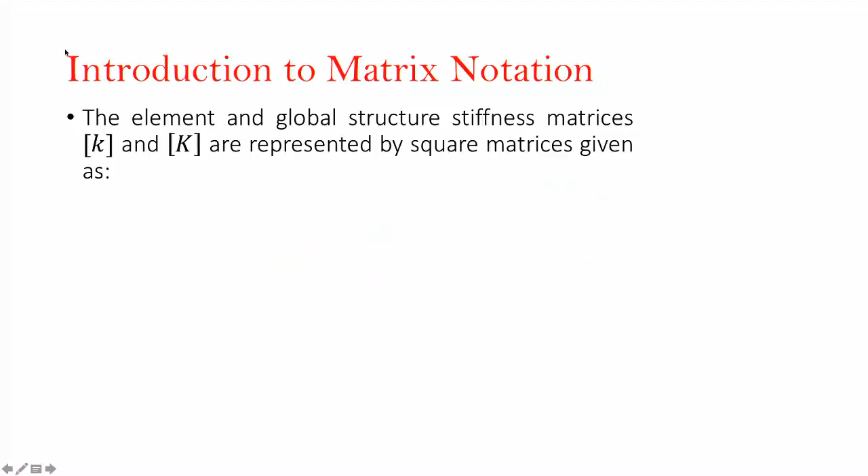Good morning, everyone. So today is the third lecture in FEA. If you remember from the previous lecture, we learned about the different types of elements and how to derive linear shape functions, and then we learned a little bit about the matrix notation.

So the last slide that I showed you last week was this slide, about the element stiffness matrix and global stiffness matrix. The element stiffness matrix is shown by little k, and capital K is for the global stiffness matrix. I put a point here, in green, that the size of the K matrix is showing the number of the nodes.

This is not really general, so I want to add another point to this. Whenever we have only 1 degree of freedom per each node, this statement is true. So the size of the global matrix, or even the element matrix, equals the total number of nodes, or the total number of nodes of that specific element. In other words, if the degree of freedom is more than 1 for each node, then you need to multiply the degree of freedom for each node by the total number of nodes, and that would be the size of the total K matrix.

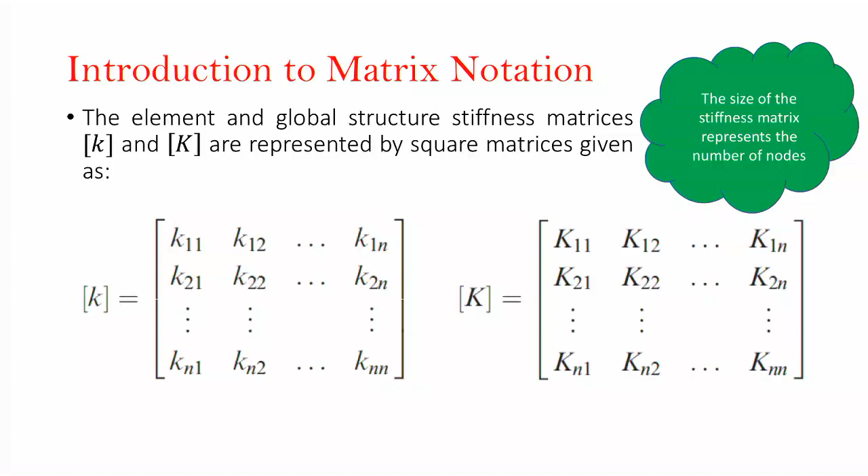So I'm going to explain it more using examples, but I'm going to update this slide after today's lecture. Right, so moving on to today's lecture.

So what we're going to learn today is we're going to solve a simple problem using FEA and learn how to assemble the global stiffness and nodal force matrices.

This is to just remind you about the 8 steps of going through FEA to solve an equation. As you remember, in the last session we talked about step 1, step 2, and step 3. Step 1 was about the discretization and choosing the appropriate element type. Step 2 was deriving a displacement function, which was basically showing the shape functions. It could be linear or it could be a quadratic function. And the third step is about the relationships between the strain displacement and stress and strain.

So these relationships can be obtained from the material. It depends on the material that we want to choose for that element or for the whole body of the structure.

So today we're going to go to step 4, 5, and 6: deriving the element stiffness matrix, how to assemble the element equations to obtain the global and total equations, and finally introduce the boundary conditions to solve the unknown displacements in step 6 and solve for the element strain and stress for reporting results after solving the equation.

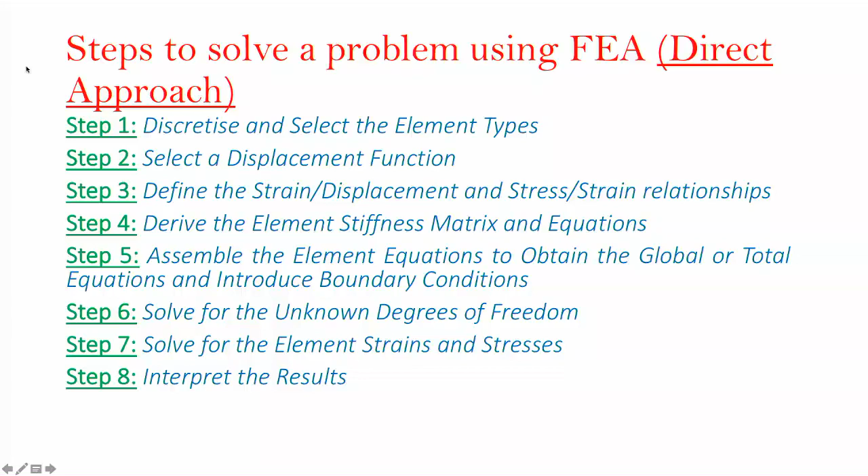So similar to Hooke's law, within each element or the total structure of the body that we want to analyze, this relationship should be satisfied: F equals KD. F is the force, like a force nodal matrix. K is the global K matrix or global stiffness matrix. And D is the matrix of displacement, nodal displacement matrix. So just keep this relationship in mind. We're going to use it over and over.

And if I want to expand it in the matrix form, it would be like this. If you look at the force matrix, the first subscript is showing the node number that the force is applying on, and the second subscript is showing the direction of the force. So F1x means that the force applying on node number 1 in direction x. And the same for F1y and the other node.

And if you look at the displacement matrix, U1 is showing the x displacement for node number 1. V1 is showing the y displacement for node number 1. And W is for the displacement in z direction.

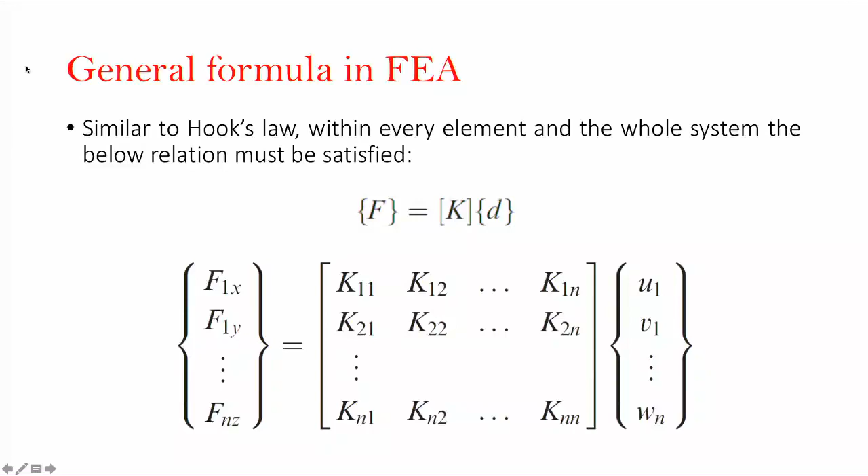So we start an example with this, the simplest example that we can come up with. Imagine that we want to analyze a linear spring. We want to start with only one element, so we assume that the whole spring is one element, right?

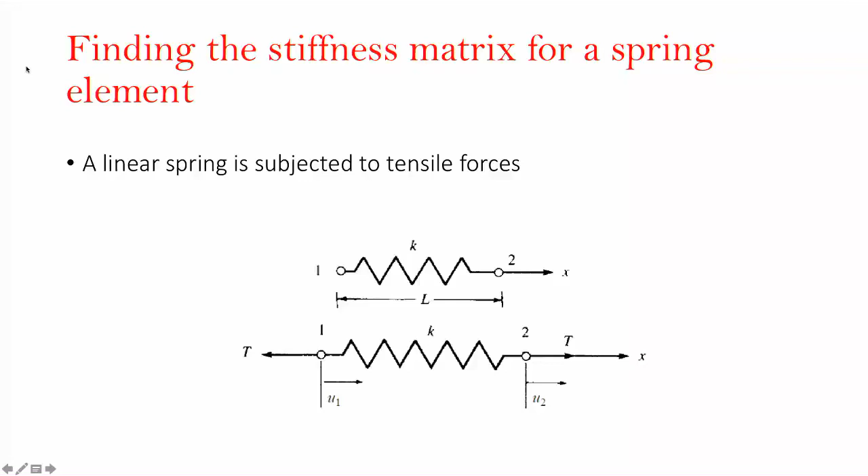So these are the assumptions that we want to make. The spring is linear, and we are applying two tensions on the two ends of the spring, which are equal to T. So we label each end of the spring as one node. The first end is node number 1, and the second end is node number 2.

Since we're only having the axial force, like the tension in x direction, we only consider the x displacement for these two nodes. In other words, we only have 2 degrees of freedom for this single element, U1 and U2, displacement for node number 1 and node number 2.

And the other thing is, the initial length of the element is L before applying any deformation to the spring. And based on the material property, or spring constant, is K.

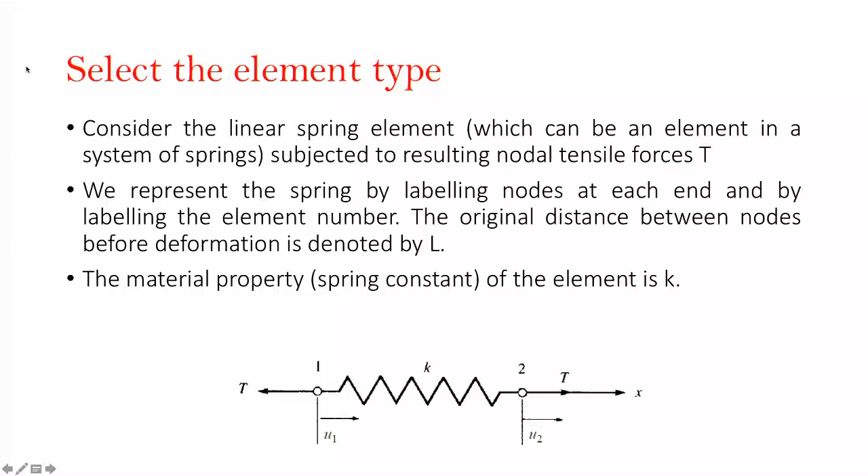So that was the first step. It was discretization and selecting the element type. We discretized the spring as only one element. We use the linear spring element with the spring constant of K.

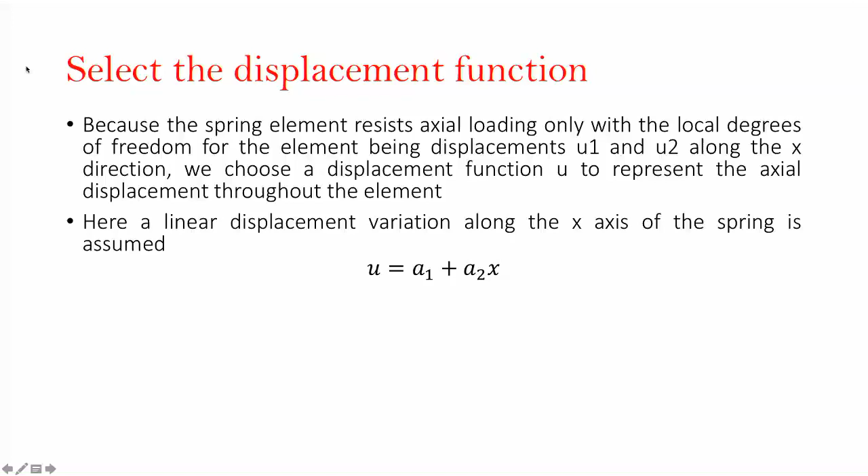Now the second step is choosing a linear displacement function. Since it's linear, we can just assume that, in general form, U displacement for all the nodes sitting on the spring equals A1 plus A2x. A1 and A2 are unknowns, and we want to calculate them pretty much the same as the way that we derived the linear shape functions last week. So here, since we only have 2 degrees of freedom, then we only have 2 unknown coefficients, A1 and A2.

So now we want to find out the A1 and A2 for the displacement function.

So I'm going to switch to the document camera.

So U, which is a function of x, equals A1 plus A2x.

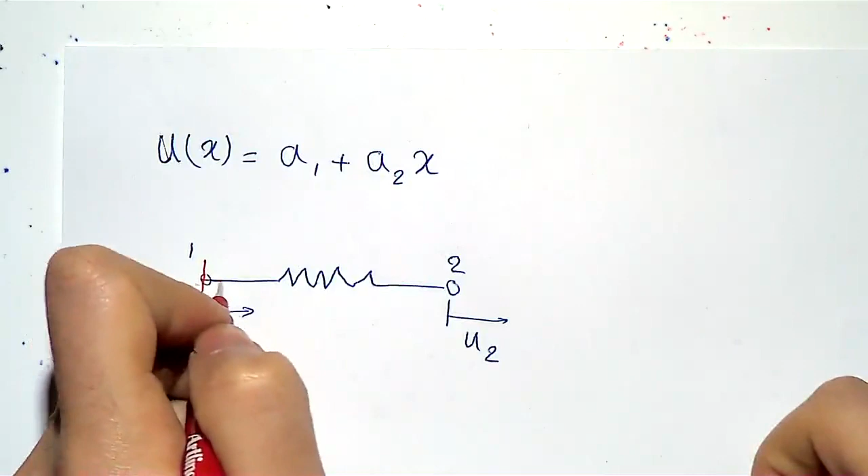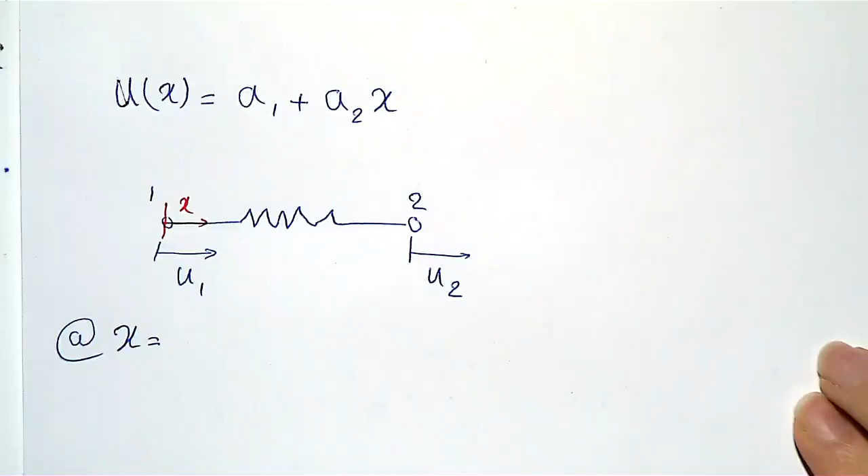the origin of the coordinates onto node number 1. So this is the origin of the coordinate, which means that at x equals to x1, which is basically 0 here, u1 would be a1.

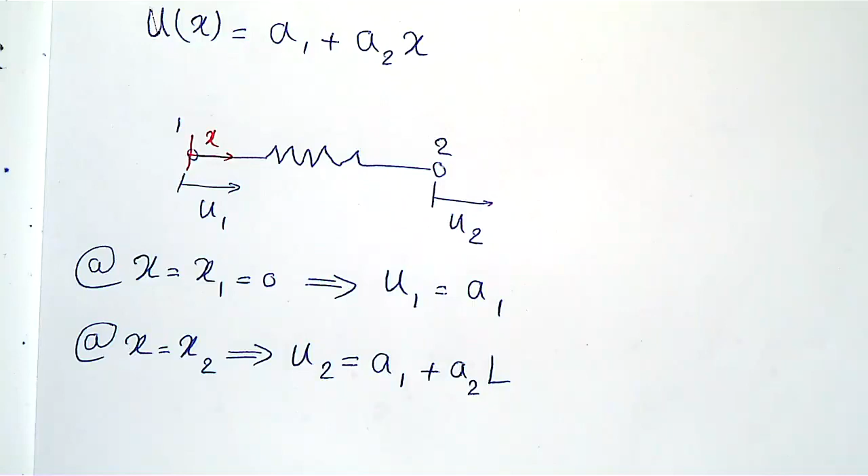I'm just applying the boundary conditions here. And for node number 2, at x equals to x2, u2 equals to a1 plus a2 L. Assuming that the origin of the coordinate is on node number 1, then x1 would be 0, and x2 would be the length of the spring, which is L.

And from this, if I substitute A1 with U1, then A2 would be U2 minus U1 over L. So we found the coefficients A1 and A2.

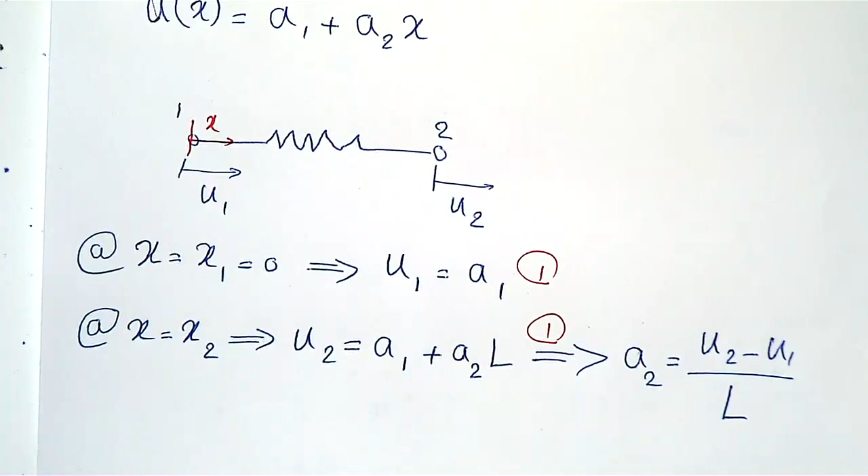Now I want to write it down in matrix form. So U would be the multiplication of a row matrix and a column matrix. You can call each term of this matrix N1 and N2. So N1 and N2 are basically shape functions, very similar to the linear shape functions that we found in the previous lecture.

Any question about the derivation?

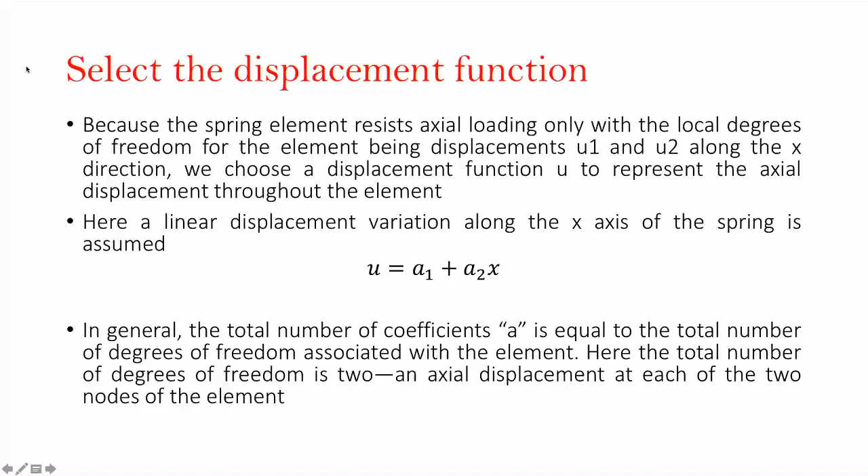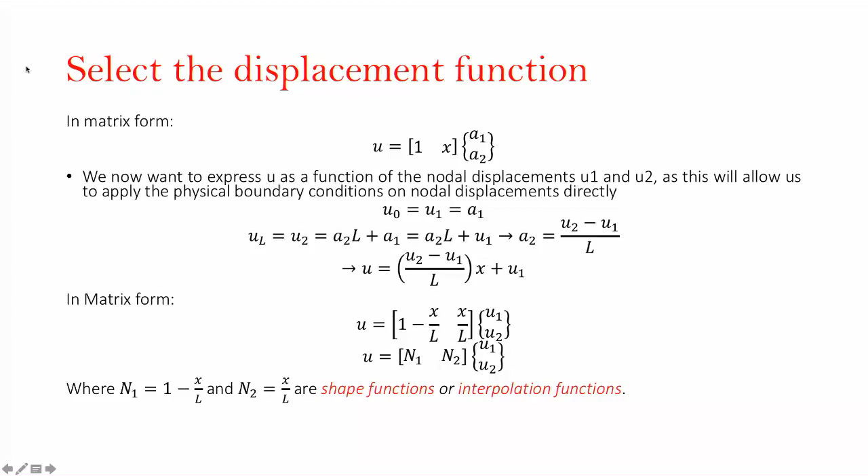All right, going back to the slides, all the calculations and derivations are on the slides. This is how we did it. We applied the boundary conditions, and then we found A1 and A2 in terms of the nodal displacements U1 and U2. And then we call these two terms N1 and N2 shape functions or interpolation functions.

So the third step is now just defining the strain and displacement and the relationship between stress and strain. This is based on the material that we're using here and the equations that should be satisfied. It's a linear spring, and we all know that the deformation in the linear spring is proportional to the tensile force that we apply onto the spring. So just remind yourself, what was the general formula for FEA?

F equals to KD. F was force, K was the K matrix, and D was the displacement. The reason we need to use strain-displacement and then stress-strain is to find the relationship between the force and displacement here, and then derive the K matrix. But the good point about the K matrix for the spring element is we can just find that very easily without calculating the strain.

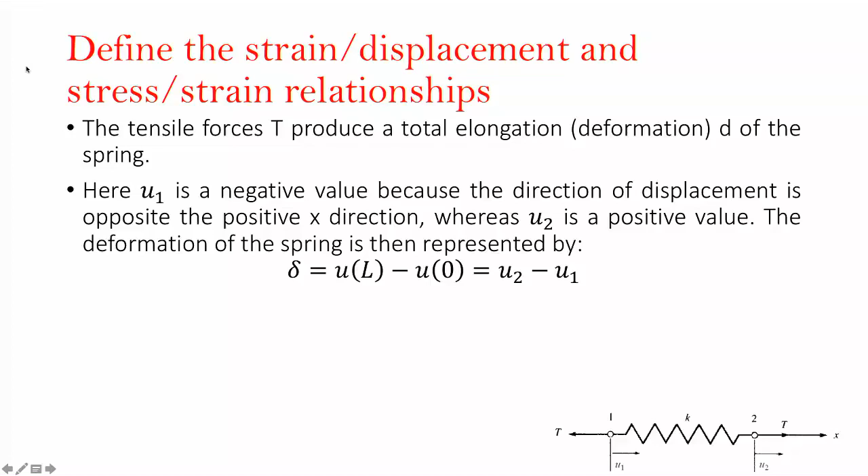We know that this is the deformation, U2 minus U1, and we know that the tension is proportional to the spring constant and the deformation of the spring. In other words, T, the applied force onto the two nodes of the two ends of the spring, equals K times U2 minus U1. So basically here, we didn't need to calculate the strain, because we found the relationship between force and displacement directly. So it made it much easier.

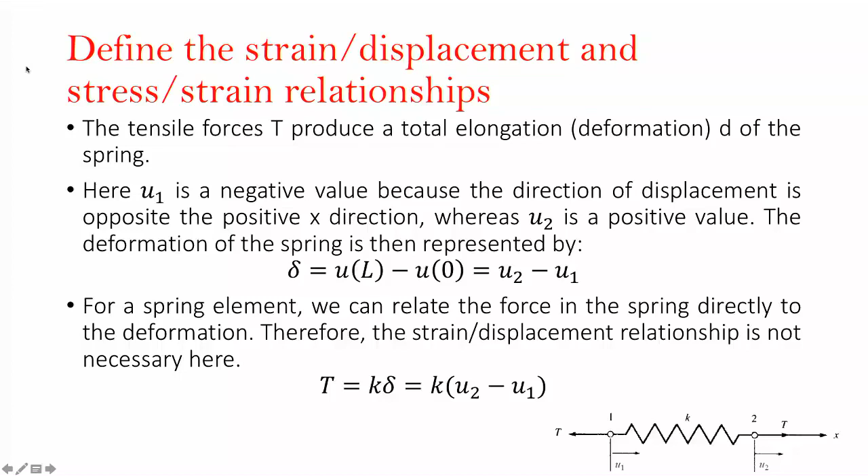So I'm going back to the document camera again to derive these equations.

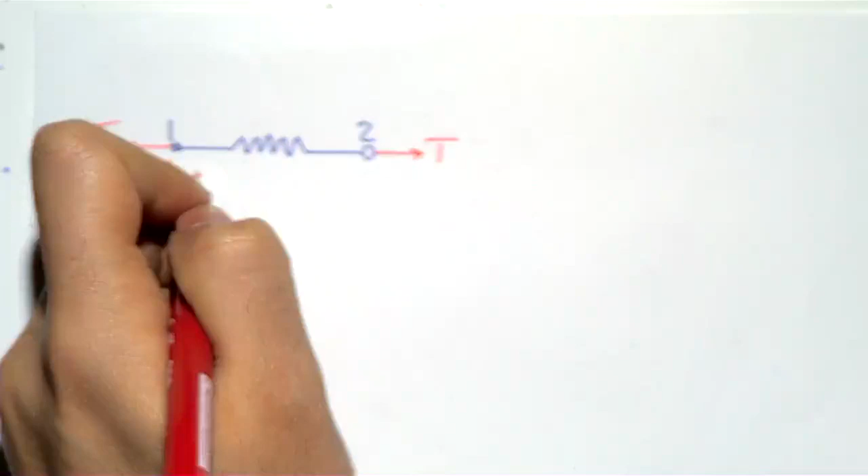This is node number 1, node number 2. This is the external forces, and this is the displacement at each node. So the way I want to calculate the K matrix for this spring is just deriving all the equations that need to be satisfied, like the equilibrium equations on the spring. It means I want to draw the free body diagram for each node and the element. So we have three components here: two nodes and the spring.

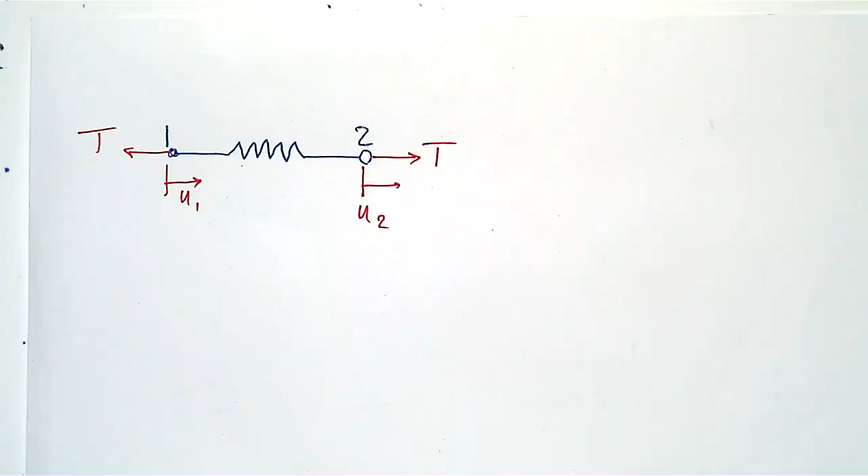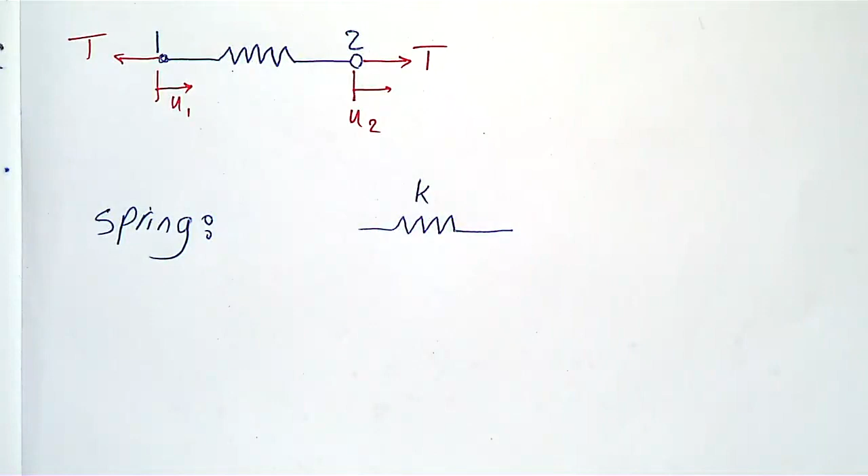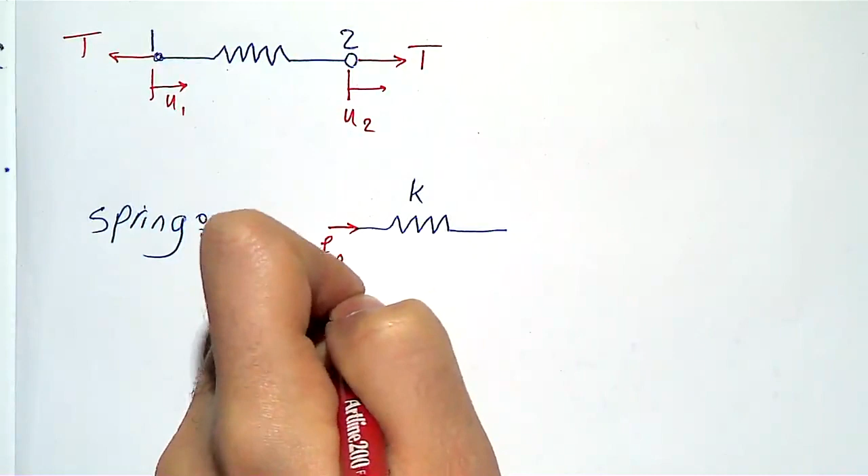So if I only look at the spring, these are the internal forces applying onto the spring, which are basically coming from the nodes.

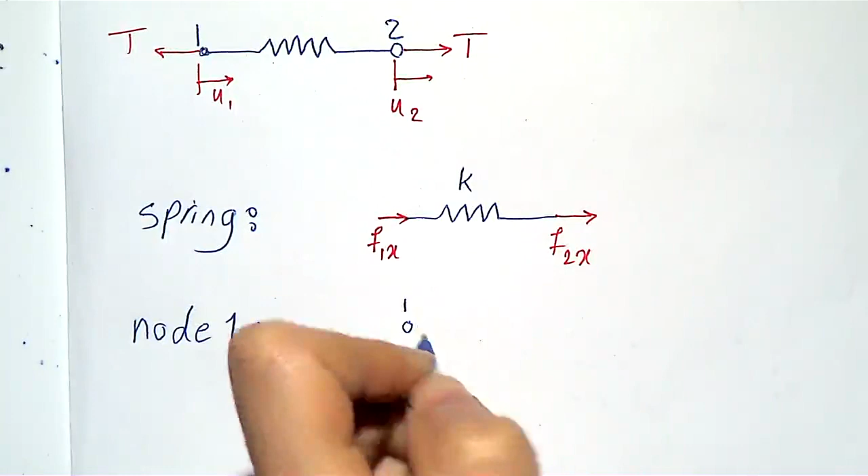And then if I do the same for node 1, this is node 1, so we have an external force here, which is T, and one internal force from the spring, which is basically opposing the movement of node 1 with force T. The reason the direction F1x here is to the right is I just assume all the internal forces on the element act in the positive direction to the right. Then I apply the reaction of that onto the node. This is the third Newton's law.

And for the second node, again apply the reaction of little F2x, and the external force. So what we found from node number 1 is we know that sigma Fx should be 0, and then T equals minus F1x. And for this one, if we apply equilibrium, all the forces should be in equilibrium, then T would be F2x.

And what we just found about the relationship between the external force and deformation of the spring was T equals K times U2 minus U1, right?

So now what I want to do here is find out F1x and F2x in terms of U1 and U2. So this would tell me that F1x is K times U1 minus U2, and F2x is exactly equal to T, K times U2 minus U1.

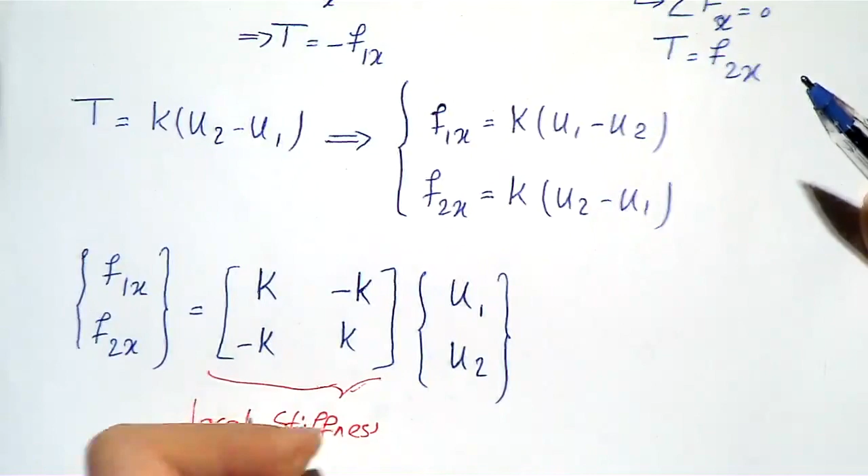So what we did here is we knew that the external applied tension was proportional to the deformed length of the spring and the spring constant, T equals K times U2 minus U1. And then to find the nodal forces acting onto each node, F1x and F2x, we drew the free body diagram for each node and the spring, and found the relationship between the external force and the internal forces F1x and F2x. Then we wrote down these two equations, F1x and F2x, in terms of U1 and U2 in matrix form. And this is the K matrix.

So we have two nodes here. Each node has 1 degree of freedom. In total, we have 2 degrees of freedom. That's why the K matrix here is 2 by 2.

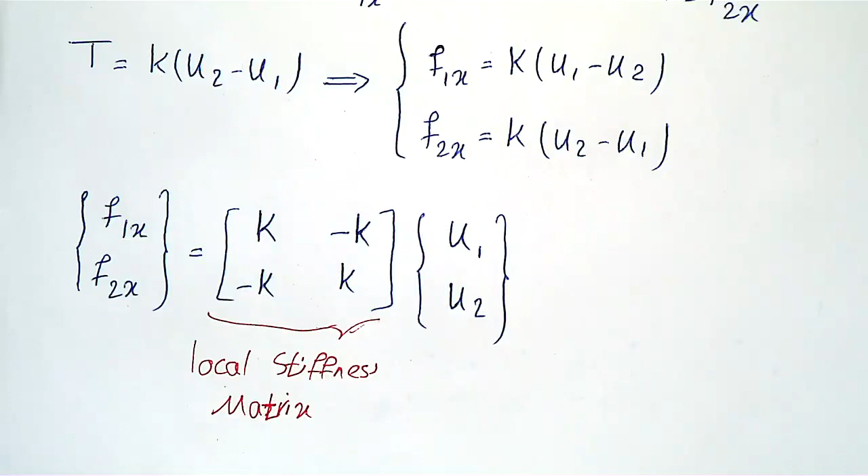Any questions? Yes? Don't we apply the external force on the spring? Can you say it again? In the free body diagram, you mean? On the spring, you said? Yeah, the external T? Yes, so these are the things that we have.

We have two nodes, like two points. They attach to the spring, and we apply the external force onto the two points, not onto the spring directly. That's why it doesn't show up in the free body diagram for the spring, but we can see it on both nodes. It's like a handle - we have 2 handles, and the spring is connected to the 2 handles. So we're pulling out the 2 handles, basically applying the forces indirectly to the spring.

Any other question? All right.

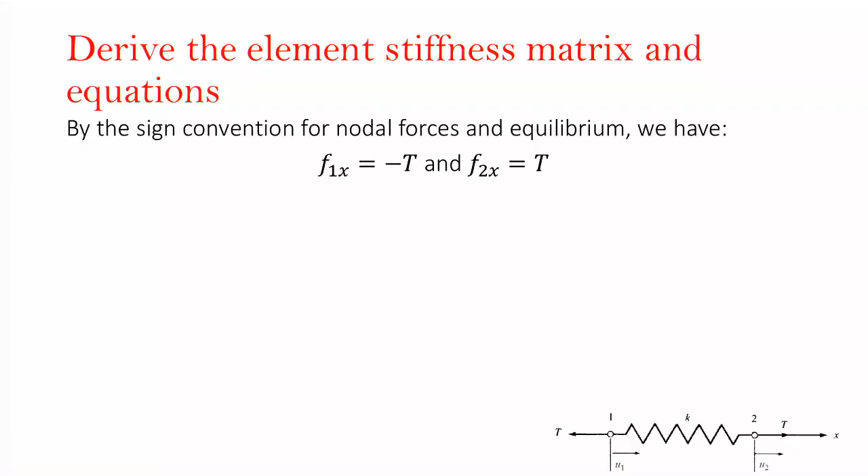So this is how we did it, how we found the element stiffness matrix. It's very easy, like K minus K minus K and K.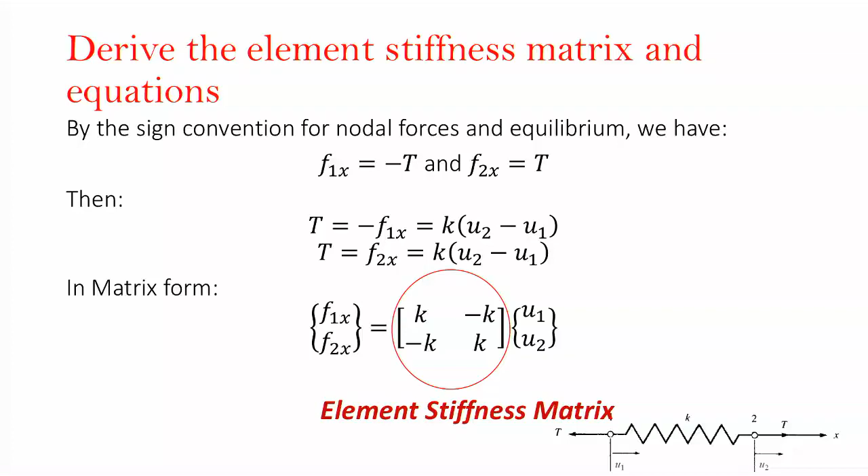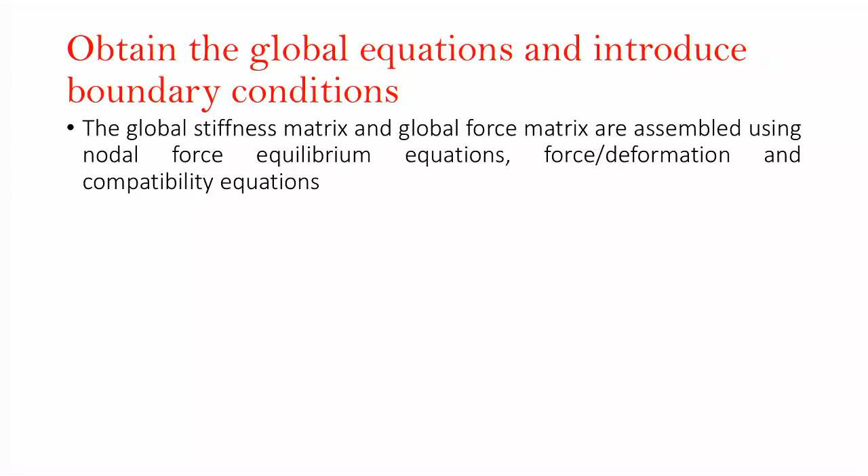And so now we found the element stiffness matrix. Now we need to go for the global stiffness matrix. But the good thing here is, since we only have one element, the local stiffness matrix equals the global K matrix, and the same for the force matrix. So little k equals capital K, and little f matrix equals capital F.

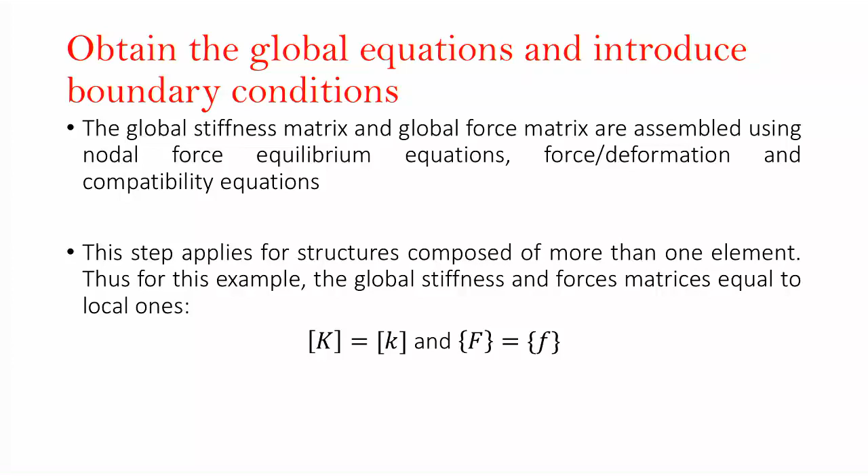So this was a general example. If we know the external forces, then we can easily find the displacement U1 and U2 based on those 2 equations, or in the matrix form.

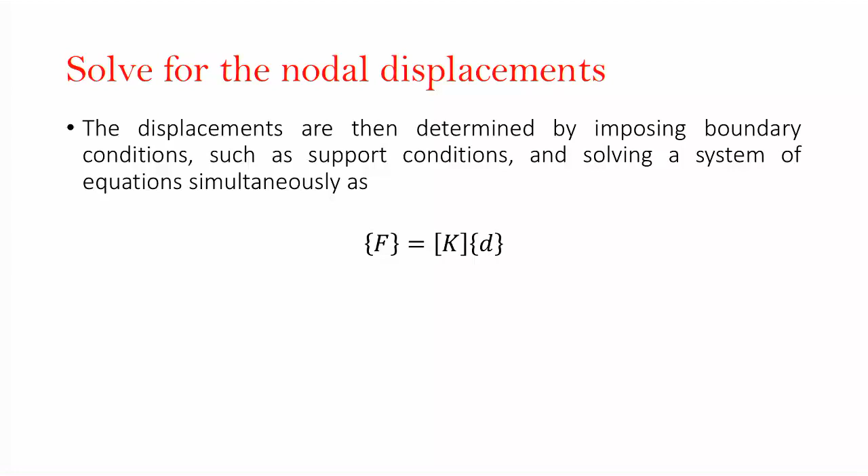And if we want to find the displacement, we need to apply the boundary conditions. The boundary condition here is the external force. So we replace F1x with minus t and F2x with t, and U1 and U2 can be calculated.

So now, what if we have more than one element? That one was very easy - it was good to show how to derive the K matrix for each individual element. But the thing is, what if we have more than one element, which in 100% of the cases we have more than at least 2 or 3 elements.

So this is an example here. This time we connected 2 springs together with 2 different K matrices. One end of the first spring is fixed, and we're applying 2 external forces, F2x and F3x, on nodes 2 and 3, right?

So we have 2 elements here. How many nodes do we have here? 3 nodes. Which means that, assuming we only have x displacement, how many degrees of freedom do we have in total? 3. Again, it means that the global K matrix should be exactly the size of 3 by 3.

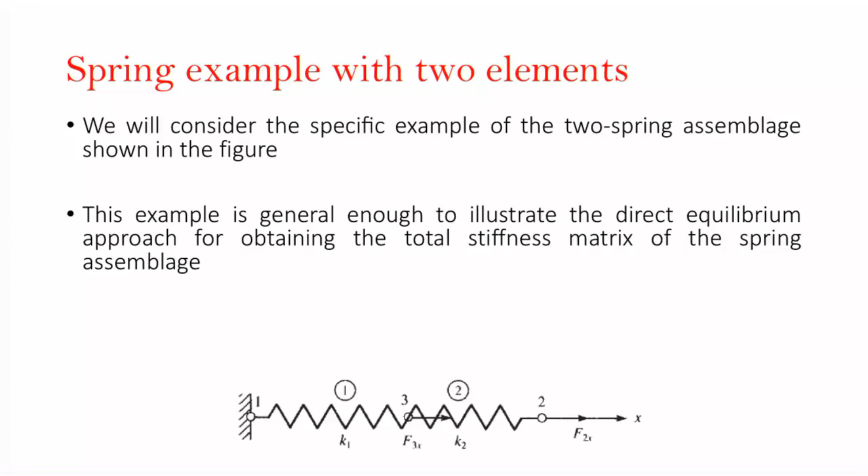All right, stiffness of the spring elements 1 and 2 are K1 and K2, and we're applying axial forces F3x on node number 3 and F2x on node number 2.

Whenever we have more than one element and want to assemble the global matrix, the first thing to do is find out the common nodes. Here we have two elements connected to each other through one node, node number 3. Just remember that, that's the tricky node here.

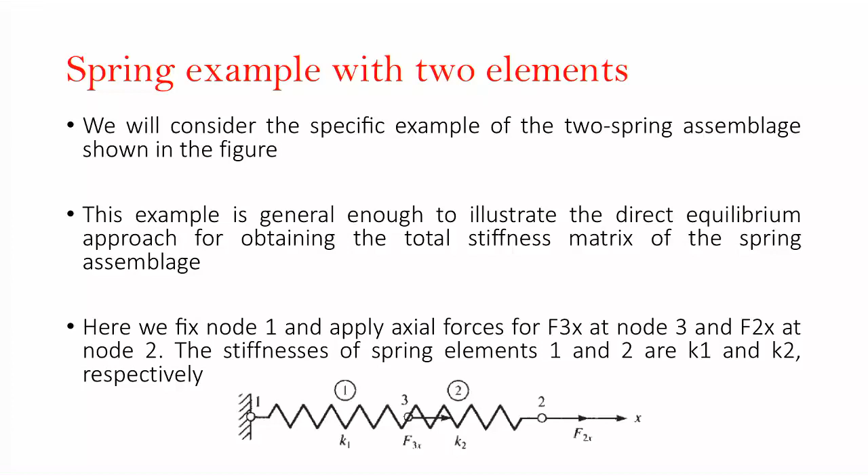Based on the element stiffness matrix that we've derived, we can just write it down again for each individual element. It's the same, it doesn't change for any of them.

But be careful about the subscript and superscript. For example, for spring number 1, element number 1, we have two nodes, node number 1 and node number 3. That's why in the first equation you can see F1x, F3x. The superscript shows the element number, the subscript shows the node number. This is important, don't get it confused.

For element number 2, we know the end nodes are node number 2 and 3. That's why we have 2 and 3 in the subscripts, and the superscript for all of them is 2.

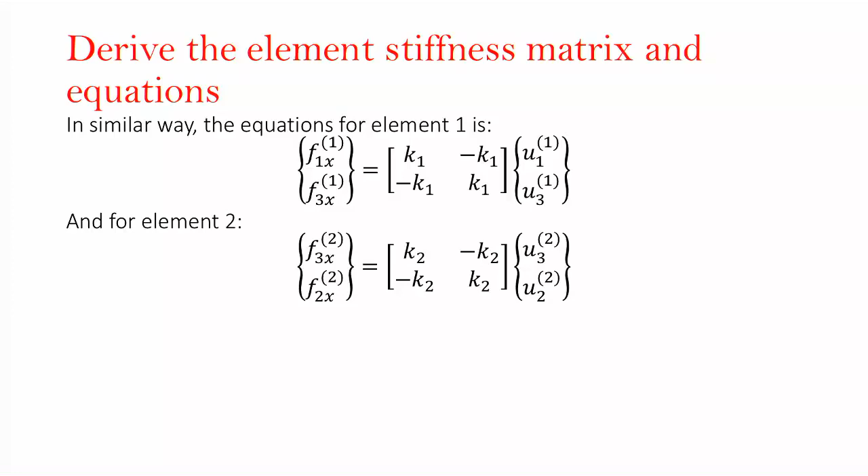If you want to use the same method I used for deriving the element K-matrix, which was writing down the equilibrium equations for nodes and for a spring, we need to make sure that the displacement of node number 3 calculated from element 1 and element 2 should be the same. This is the continuity rule or compatibility requirement. It doesn't matter which element you're calculating the displacement for node number 3 from, since it's a common node, you should get the same answer.

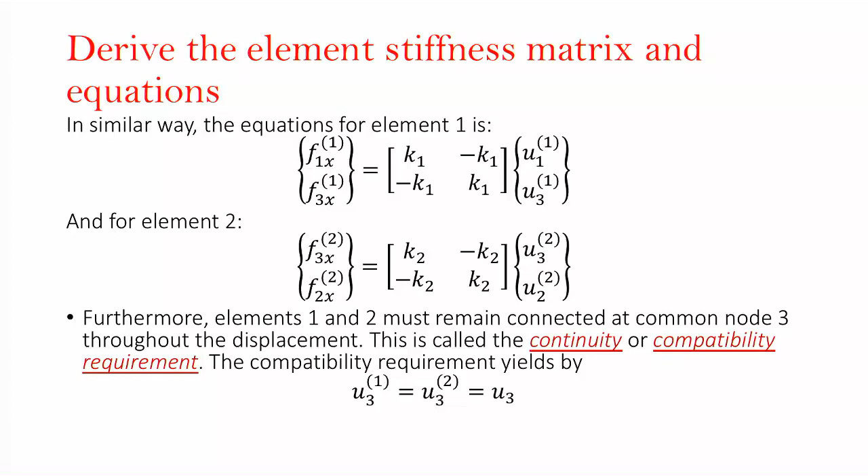If you want to use the free body diagram, we have 3 nodes and 2 elements. So we can break down all these 5 components and do exactly how I did for the one individual element. Here we can see that if you look at node number 3, capital F3x should be equal to the summation of the little f3x for element 1 and f3x for element number 2. This is the equilibrium equation at node number 3.

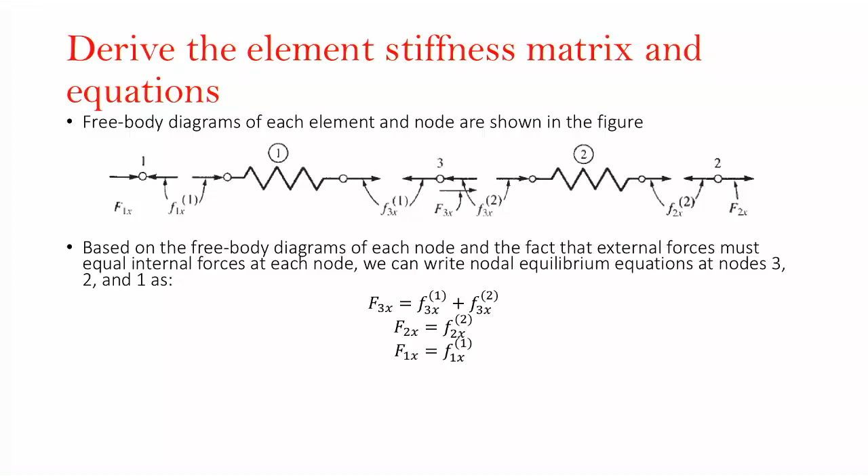If you look at node number 1 and 2, these equations should be satisfied. So capital F1x is the reaction force at the fixed end. We don't know it, right? We only know that the displacement is 0 there.

So then we just substitute the little f3x for element 1 and element 2, and then we can find out the equation for capital F3x in terms of U1, U3 from both elements. And the same for F2x and F1x. So now we have three equations in terms of all the nodal displacements U1, U2, U3.

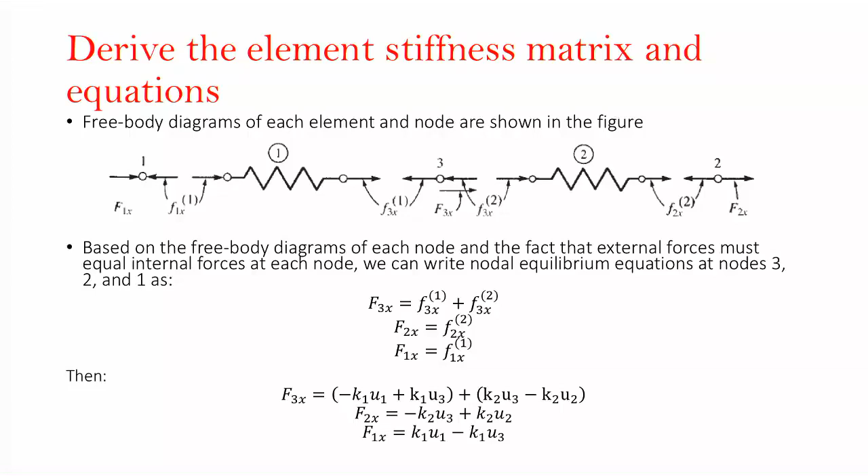Now we can find out the global K matrix, which is this. I just wrote it down in matrix form from those three equations in the previous slides.

But this sounds too difficult, right? Just checking the elements and nodes and satisfying the equilibrium equations, it's really time consuming.

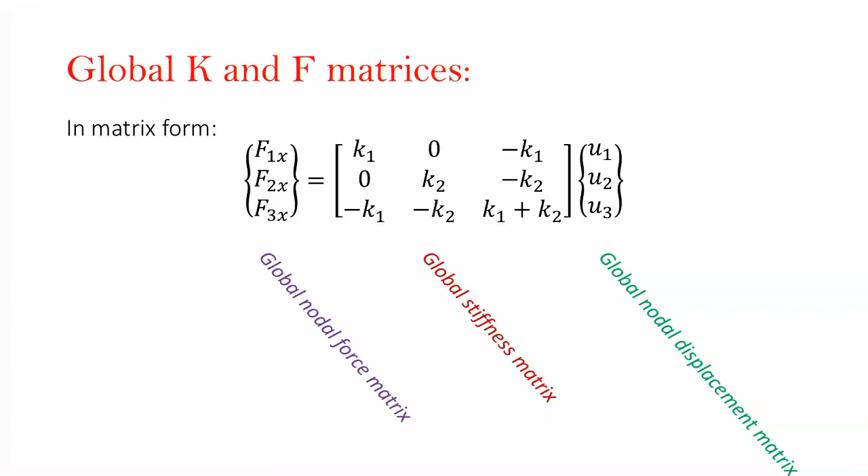Fortunately, there is another way to do this, which is called the direct stiffness method. So this is how it works. We have two elements, and we know the K matrix for each of them. For element number 1, it's K1, minus K1, minus K1, K1, and the same for spring number 2.

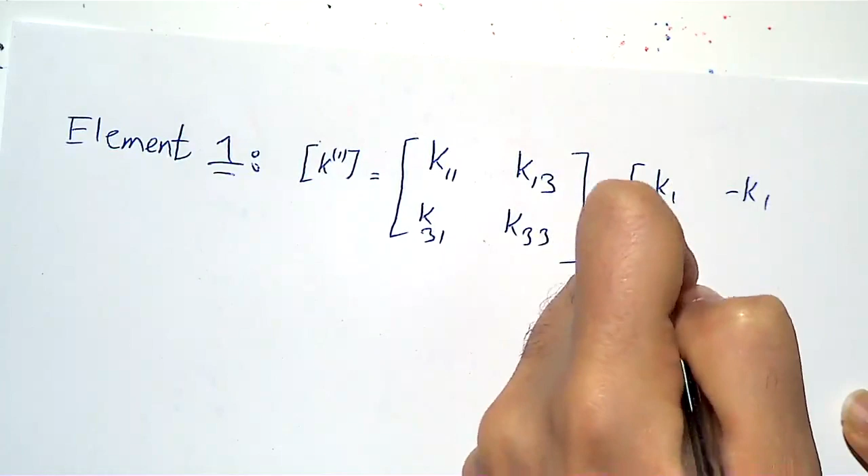I think it's better to write it down. So for element number 1, the little K matrix was K11, K13, K31, and K33, showing you what nodes are located at the ends of this element: node number 1 and node number 3.

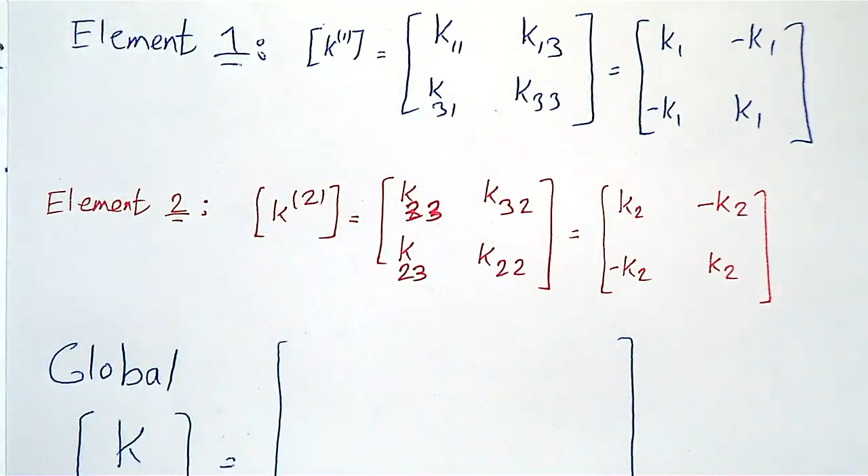It's 3 by 3. This time, for writing down the global K matrix, I put the numbers in order. So if I put node here, this is showing node number 1 related to node number 1, related to node number 3, and the same for the rows.

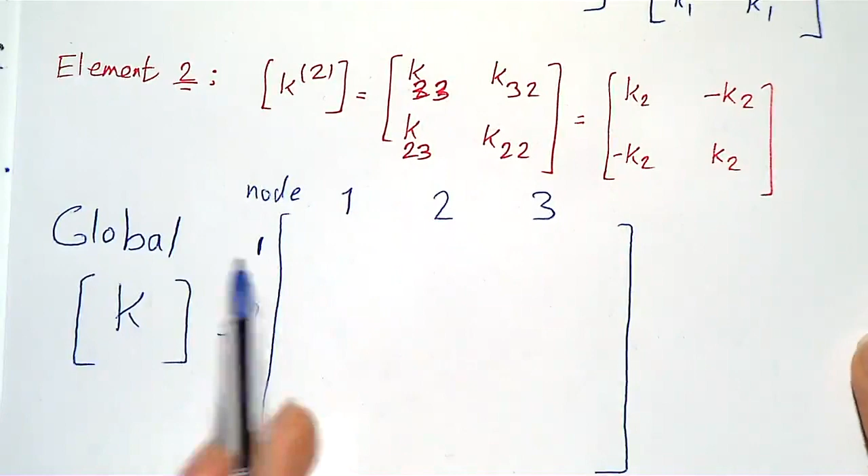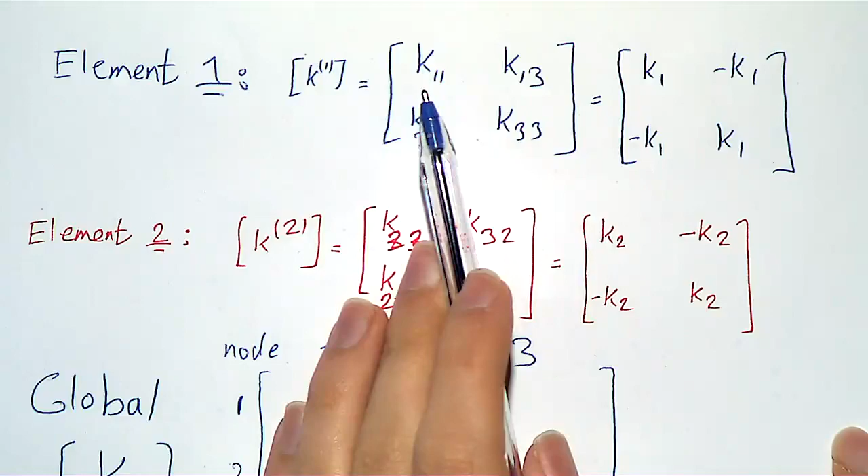So these are not coefficients, right? Don't get confused for that. This is just a guideline to interpret what each component in the global matrix means. So for node number 1, definitely it's K11, right? Where do we have K11 from these two elements? It's only here, right? So I'm going to put K1 here.

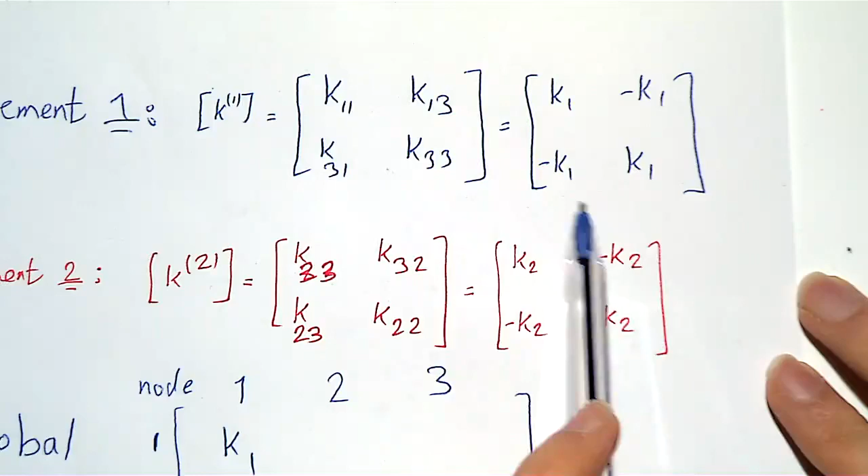So let's just put all these 4 components into the global matrix. We have K11 is K1, K13 is minus K1, K31 is minus K1, and K33 is K1. K13 is minus K1, K31 is minus K1, and K33 is K1. Right?

And now I want to do the same for element node number 2. We have these 4 components. I want to disperse all these 4 components into the global matrix. We have 3 by 3, 3,2, 3,3, 3,2, 2,3, and 2,2.

This is K22, it's K2. K32 is minus K2. This is minus K2. And this is the tricky point here: as you notice, in all these 8 components in total for the K matrix for element 1 and element 2, there is only one common component, right? Which is K33.

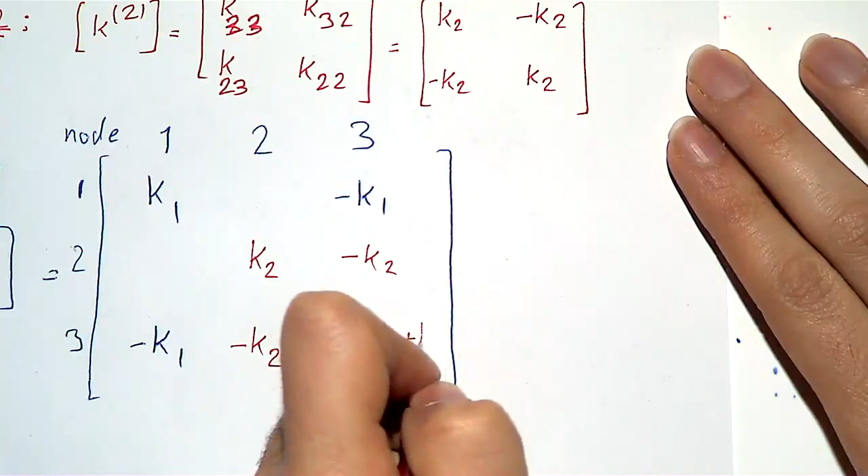This is where you need to add up these 2 components and put it in the global matrix. So here should be added up to K1 plus K2. And if you don't have any value for the rest of the components in the K matrix, just put 0 there.

So can anyone tell me what it means to have 0 values for some of the components in the global K matrix? For example, for component K12, it's 0. Exactly. So if you just look at the problem, this is node number 1, 3, and 2. Node numbers 1 and 2 are not connected to each other directly. Right? So that's why it's 0, and that's why the corresponding components in the global K matrix is 0.

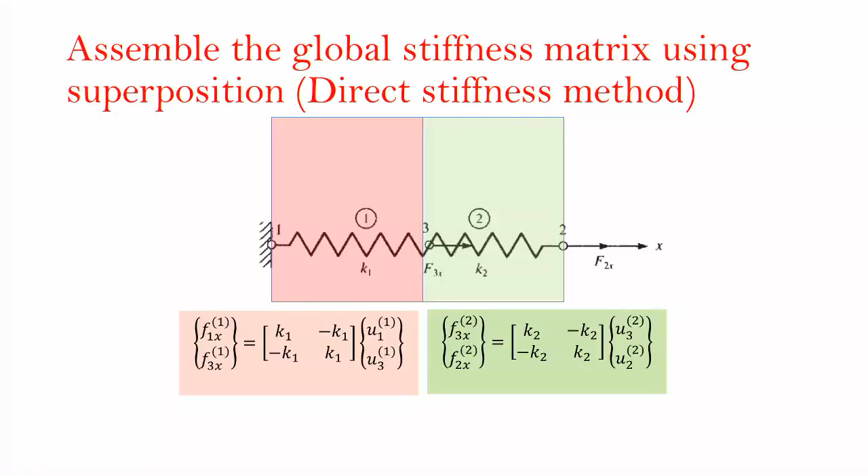All right, so this is the way to do it. Just be careful that the order you put for the K matrix, like 1, 2, 3, should be the same for the displacement matrix and force matrix. Any questions about the direct global matrix?

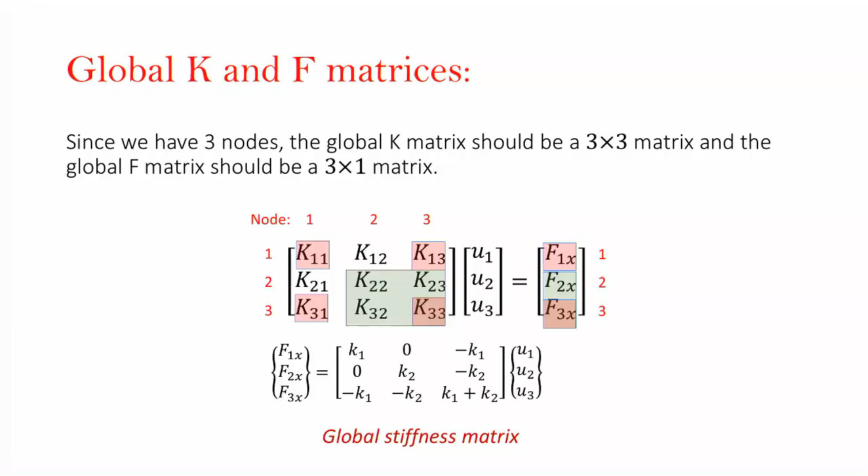Right, so this is the global stiffness matrix for these 2 spring elements. And now we want to apply boundary conditions. There are a couple of things left, I'm going to say it quickly. The first thing is node number 1 is fixed. What does it mean? The displacement at node number 1 should be 0. So if I want to say it in mathematics, u1 equals 0, right? So in the equation f equals to kd, the general formula for FEA, we put u1 as 0.

And then the rest of the equations can just be expanded to find out f2x and f3x. And if we know the external forces at node number 2 and 3, which are the capital F2x and F3x, it's very easy to find out the displacements at node number 2 and 3. So this is just like mathematics. We know that when we have an equation like matrix multiplication A, B equals C, if we want to find B, we need to calculate the inverse of matrix A.

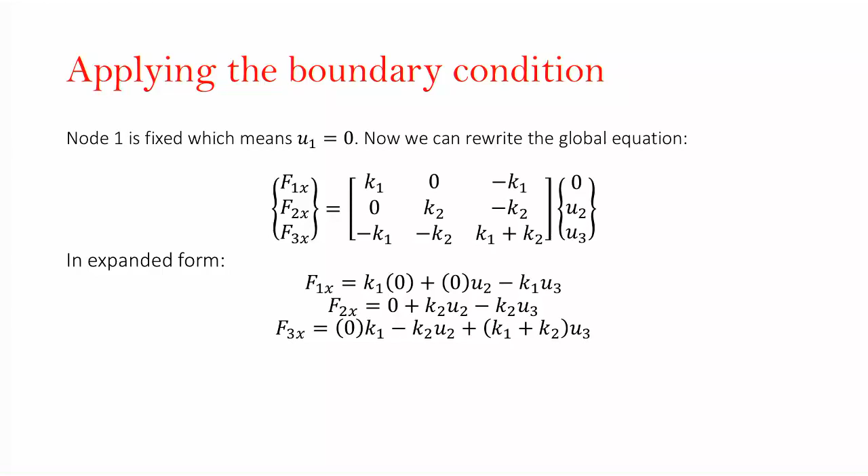So here we need to calculate the inverse of the K matrix. And if you do that, this would be the nodal displacement in terms of F2x and F3x. And once we get U2 and U3, it's very easy to go back to the first equation, F1x, and then calculate the reaction force at the fixed end based on U3.

So this is a very nice homework for you guys. Try to practice it at home. Hopefully I'm going to go through it next week before the mid-semester exam. But try to solve it yourself and derive all the equations that I did here at home, to make it easier to understand and learn the concepts of the global matrix and how to apply the boundary conditions. Any questions? All right, thank you so much. I'll see you next lecture.